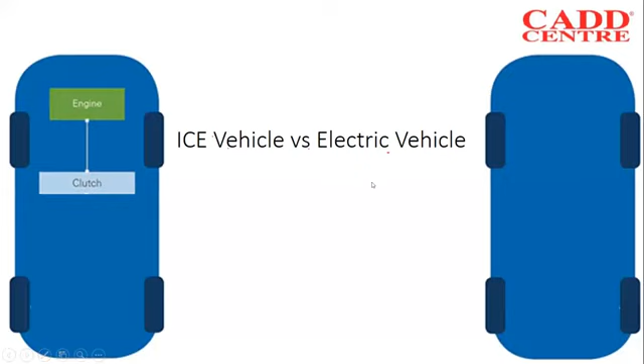The first difference will be... just a second. We will have an engine in our IC engine vehicles, and secondly, in a common conventional vehicle, we have the clutch to change the gears and things like that. Then we will have the transmission mechanism, which will include the flywheel and the connection with the clutch, and then we will have the differential to transmit the linear power along with our two wheels on the rear side.

So this is the powertrain of IC engine vehicles. Note that this is the powertrain for IC engine vehicles: we have an engine, clutch, transmission device, and a differential.

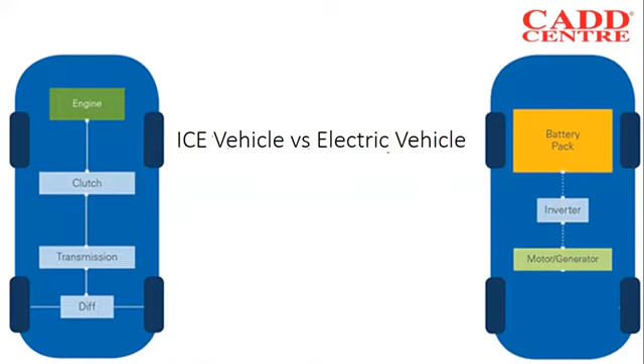Compared to this, in an electric vehicle we will only have a battery pack. We do not need an engine, we will have a battery pack, then an inverter to convert the DC power stored in the battery pack into either AC or DC. We need a motor or generator to convert that electrical energy into mechanical energy, and by that rotate our wheels and get the working going. Then we will have the differential, as always, to convert that linear energy into our wheels.

As some of you may have noticed, in our electric vehicle powertrain we have a dotted line connecting battery pack, inverter, and motor generator. This is because most of these components, let's say two-thirds, that is battery pack and inverter, can be taken as a single component. Compared to our IC engine vehicle, I'm trying to convey the idea of fewer parts in electric vehicles. So in an IC engine vehicle we have an engine, clutch, and transmission, while in our electric vehicle we have a battery pack and inverter combined into one, plus a motor or generator.

When comparing other differences between IC engines and electric vehicles, we can see there are far fewer moving parts in an electric vehicle. This term is very important when stating efficiency and lifespan. When we have a large number of moving components, the efficiency and lifespan tend to reduce by a large factor.

In an electric vehicle, we only have a static battery pack - it doesn't move at all - and an inverter, which also doesn't move. The only moving components are from the motor onwards: we have a rotating motor mechanism and a differential mechanism. Let's say we only have two moving parts in our EV. I'm simplifying this to a large factor to convey my idea to everyone in our webinar.

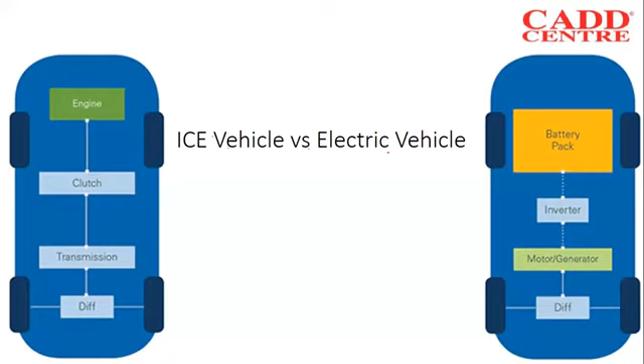So this is the basic concept that you should all be aware of as we go on to study more about electric vehicles. I hope this is clear to everyone. Let's continue with our topic.

Nowadays, all including our scooters and motorcycles, there is a digital speedometer and a digital fuel indicator. So everything is taking a digital transition nowadays. This digital transition trend is only going upwards, it is not at all coming down.

So in a smart vehicle, to function all these umbrella terms, we need large electrical power. But in a conventional IC engine vehicle, we cannot provide that electrical power using our combustion mechanism.

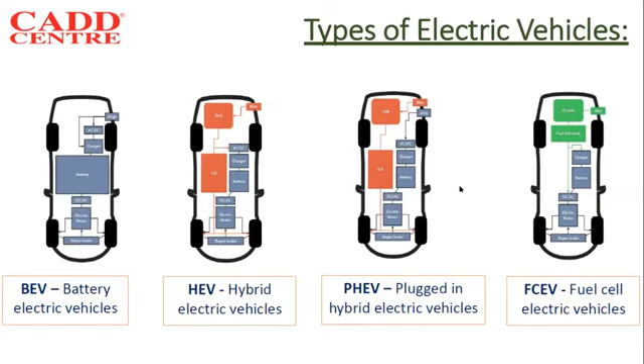So first of all, let's discuss the battery electric vehicle. In the battery electric vehicle, only the battery pack is the power source. That's why it's known as a battery electric vehicle.

A common and popular real life example for a battery electric vehicle is the Tesla Model S. You all may be familiar with the term Tesla. It is the American startup begun by Mr. Elon Musk. His name is currently very relevant because recently, last week only, SpaceX and NASA, the space organization of USA, collaboratively sent 2 astronauts into the International Space Station. It was a very successful and popular work. I followed it live on YouTube. Maybe some of you may have heard about that.

So Mr. Elon Musk started a new company, Tesla. It was an electric vehicle company and it is currently the most popular electric vehicle choice for a large number of people in the world. So for battery electric vehicles, Tesla Model S is the best example.

The next type of EV is the hybrid electric vehicle, also known as series hybrid electric vehicle. This hybrid electric vehicle has 2 power sources. The primary source will be the IC engine, and the electrical driveline or electrical power source will only be the secondary source.

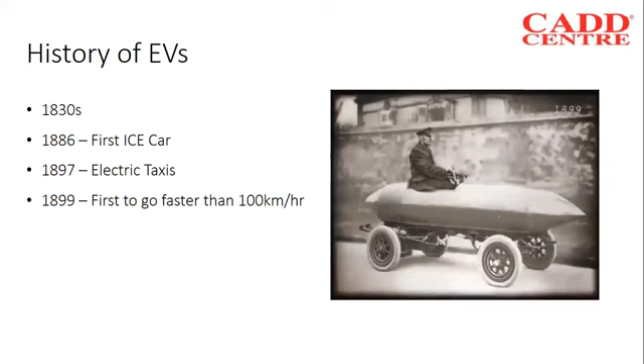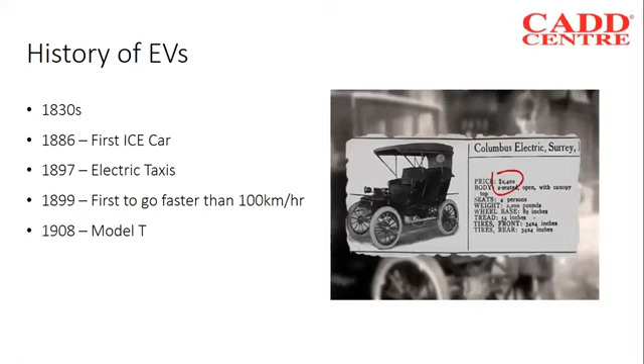Henry Ford manufactured the Model T for a meager $650, while at that time the cost of electric vehicles was around $2,400. You can see the difference—$650 for an IC engine versus $2,400 for an electric vehicle. So most people converted to IC engines.

A large number of fueling stations, petrol pumps or diesel pumps, popped up in America. Then large numbers of people started using the Model T and other IC engine vehicles, and there were some disadvantages with electric vehicles at that time. So the decline of electric vehicles began—from that point onwards, there was a steep downward growth in the EV industry.

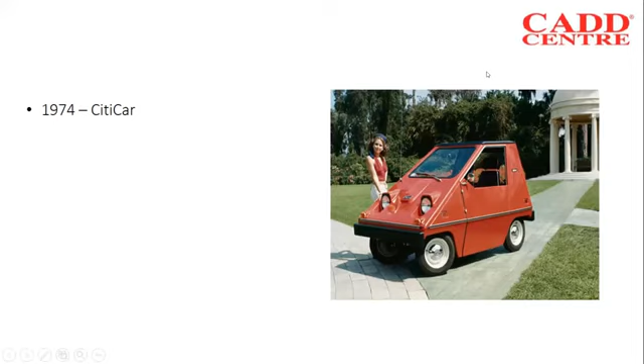But growth began again in 1974. Some of you may have seen this red mini model—it was the CitiCar. It was very popular in India too, in Bangalore and Delhi; I heard some seniors talking about the CitiCar in those cities. It was a very compact, non-polluting, less costly, economical vehicle, so it became popular with common people, and thus electric vehicles grew again.

Then in 1990 came the ZEV mandate—zero emission vehicle mandate. Globally, starting in North America, there was growing concern for the environment and climate change, and people became concerned about the pollution from IC engines. So the zero emission vehicle mandate was introduced, and many companies like Ford and others started creating electric vehicles.

In 1996, General Motors, a very big player in the automobile industry, created their first electric vehicle known as EV1, and it was a very popular choice in America. From there onwards, a very large number of companies began creating electric vehicles.

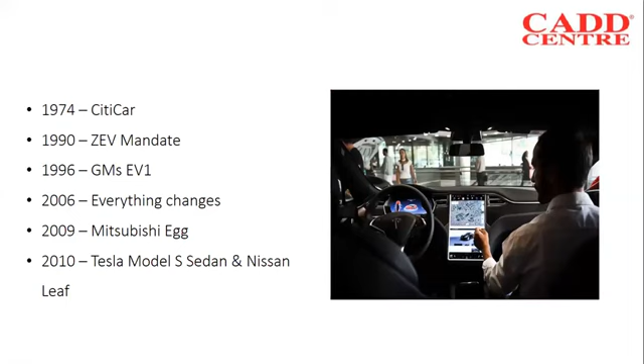In 2010, the Tesla Model S sedan came out as a luxury model, and also the Nissan Leaf, which is the most sold electric vehicle currently in the world—the most common EV sold in the industry. From that day onwards, a large number of companies began creating EVs, like the Chevrolet Volt, which was a startup acquired by Chevrolet.

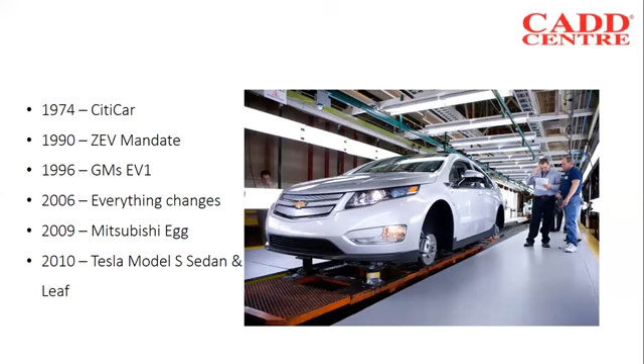Then again Chevrolet came out with a Bolt EV. Then Volkswagen also began creating EVs. Then in the Asian space, in China, mass manufacturing of EVs began, and by mass manufacturing, as you all know, cost gets reduced, and EVs began getting more popularity. So this is the brief history about EV.

So after knowing that EVs were created long ago before IC engines, we can study about the future of EV and the current situation of EV. So as promised in the agenda, let's go to the Indian automobile industry.

The Indian automobile industry is the 7th largest manufacturer of commercial vehicles in the world. It has created 30.92 million vehicles last year, in 2019, and it expects the GDP from the automobile industry to reach a whopping 16 trillion Indian rupees in the year 2026.

But there is always a but. So these expectations were upturned by what? As you all know, by the COVID crisis. So by the COVID crisis, what happened? Every industry was hit.

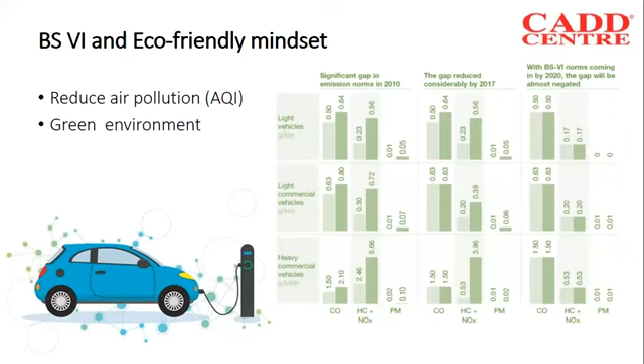But let's say human beings are overcoming our bad nature, and we all are coming together for the green environment movement. So this is my first supporting statement.

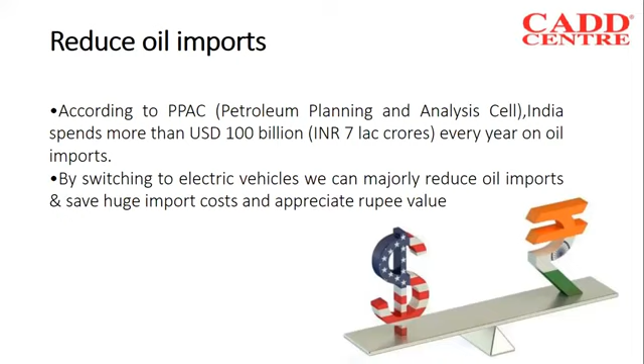The second supporting statement is that the Indian government itself is trying to reduce oil imports, because India is a big oil importer from America, Iran, Saudi Arabia and many other oil exporters. You can see on screen the volume of the petroleum import industry in India. By switching to electric vehicles, we can reduce this major GDP expense of oil importing, and use that amount for the betterment of our whole society. This is the second statement I'm putting in front of you.

The third statement is incentives. For anything to become popular or to grow, there should be cost incentives or financial incentives for common people. As we saw in the history slide, when the Ford Model T was introduced for a meager $650, the $2,400 electric vehicle model got unpopularized, while the cheaper Ford model became more popular. Why was it so? Because it was less costly, had fewer expenses, and more people could buy it.

EV manufacturers cannot reduce their cost very much because they have their own manufacturing expenses and their own R&D expenses. But the government can provide GST reductions, tax exemptions and other incentives for new electric vehicle buyers. For this incentive concept, we can take examples and ideas from other foreign countries also.

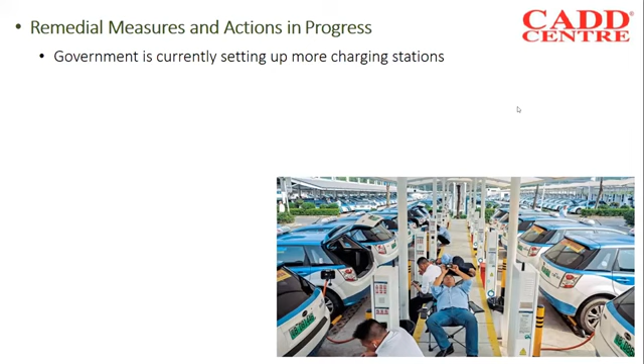So this is the first remedial action we need to take - we should create a large number of charging stations, and the government should support that, along with startups and private organizations. Ola has come up with charging stations in Bangalore, and Uber also has charging stations - these are two e-taxi companies you may know. So these two have charging stations like in the image, in metro cities in China, and also in Bangalore. And in Calicut we have new startups, new charging station startups like Charge MOD.

They have, I believe, 2 charging stations, one in Palayam. They are our industrial partner, the industrial partner of CADD Centre, so we provide internships for our students at the Charge MOD charging station. So this is the first remedial measure to be taken by the government and the private sector.

The second important thing, and the most important thing, is that R&D is very important to improve the battery range. Some of you may know the name Mr. John Goodenough - I didn't think of him while creating this presentation, but I just remembered his name. Some of you, maybe electrical engineers, are familiar with his name because he is a Nobel laureate, in 2019 I believe. He's a very familiar face in the chemical engineering industry, a very old but enthusiastic man in creating and designing new battery technologies. He was a prominent figure in lithium-ion battery manufacturing and research and development. So Mr. John Goodenough is currently also a prominent player in the research and development ongoing in battery range development.

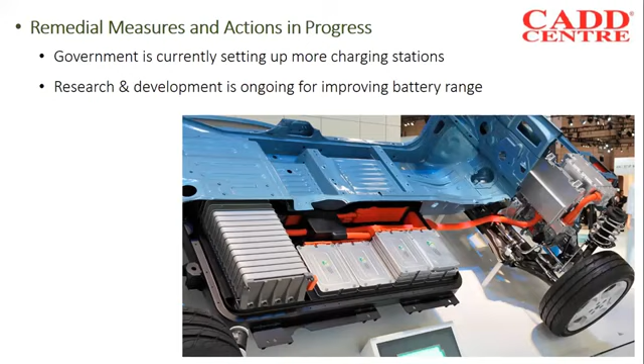So next we are going to conclude, we are reaching the final slides. We are going to talk about the need for introducing a course on electric vehicles. There are some electrical engineers in the market, some automobile engineers, some mechanical engineers. But why is there a need for electrical vehicle engineers and a course on electrical vehicles?

The first thing is the shifting trend in the automobile industry. All automobile manufacturers are changing from conventional IC engines to electrical vehicles. As I said earlier, we need the skill of a mechanical engineer, an electrical engineer, a chemical engineer, and a computer science engineer, and also many other things. All these skills should be under a single umbrella. This is the trend coming up in the automobile industry.

The second thing is that many job roles are changing, many jobs are getting lost, and many jobs are emerging in the automobile industry. There are always disruptive changes in the market. Unfortunately, the syllabus in engineering colleges, what we study, isn't anyone's fault, but the Indian system itself is a little backward. We the millennials are living in the present, studying topics and courses of the past, and going into a future that is 10 years ahead of us. When we step out in the market tomorrow, the topics and ideas there will be that of 10 years ahead, but we are not ready for that. We engineers are not ready for that.